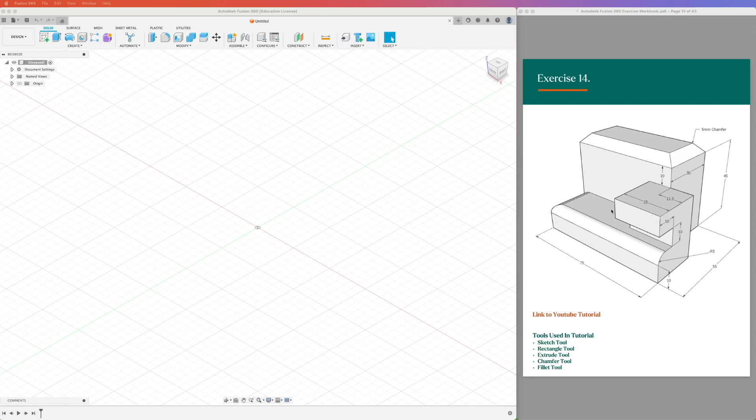I think what we're going to do here is draw this end face and extrude it back, then cut out the top half and extrude it back this way. We'll add on this last section over here, and then use the chamfer and fillet tool for these edges.

So let's get started. I'm going to jump onto this end face and draw my rectangles. This rectangle needs to be 10 plus the 5, so it's going to be 15 by...

55 minus 30. Those numbers come from 10 plus our radius of 5, going from this edge to this edge, and our 25 comes from 55 here minus 30 here. So there's our first rectangle.

Then we're going to draw our next one going up. It's going to be 45 minus 10, and the width of it is going to be 15.

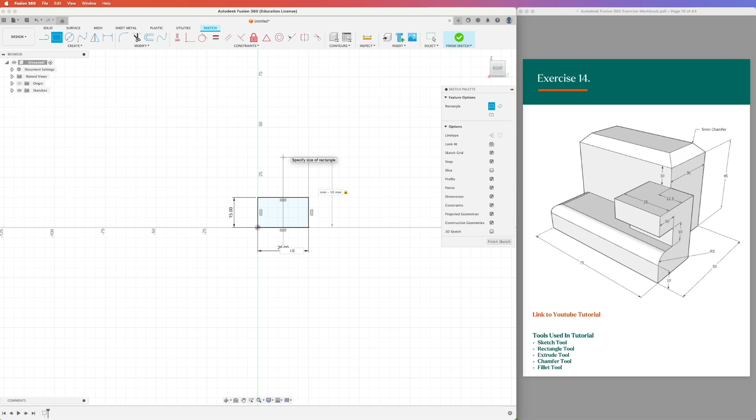So where do I get them from? 35 is 45 here minus 10. And the width here, if it's 25 from here to here, and this is 10, so this has to be 15. Then we're going to throw our last rectangle on here.

So our height of this one is going to be 10, and our width is going to be 25.

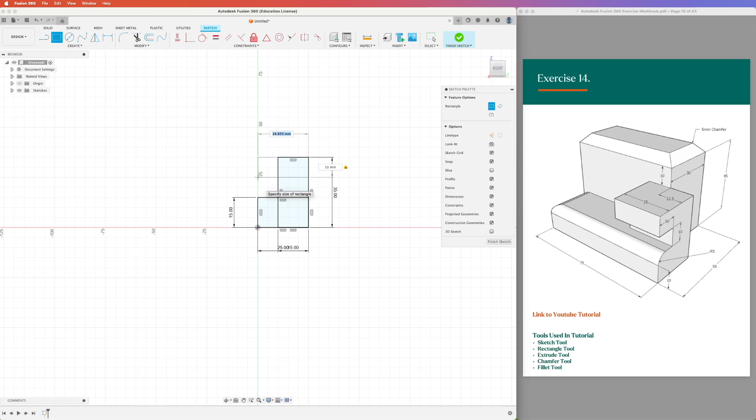So then I can extrude them back. I can just extrude all of these, and we're going to do it the whole distance, so I'm going to do it at 75. Then I'm going to flip it around.

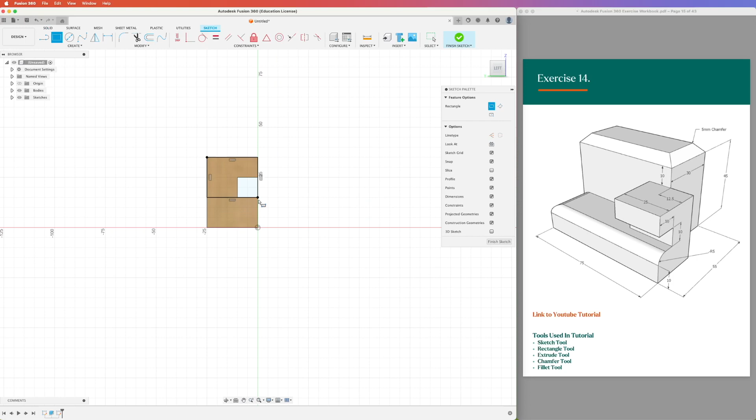I'm going to come in and create my sketch off this back face. I'm just going to grab a rectangle, go from this corner to this corner, because I'm going to cut out that other part there. So now I can extrude that way.

I can cut it out this way. So the distance of this is going to be minus 75 plus 25. Where do I get that from? 75 here, 25 here. So there's my first shape done.

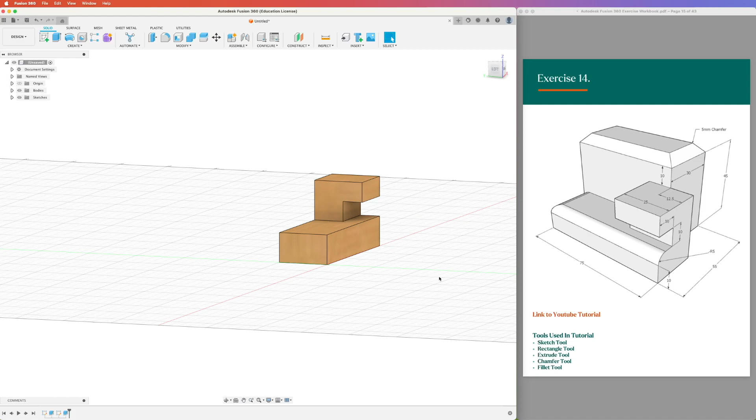I'm then going to come around and go off the bottom face, sketch, and just be careful the way it's rotated here. I need to draw this shape off this back edge, and it'll stop early here.

So we're going to grab that corner, draw him out, and he needs to be 30 wide. His length doesn't actually have a number, but we know the other one's 75, so let's just say he's about 50.

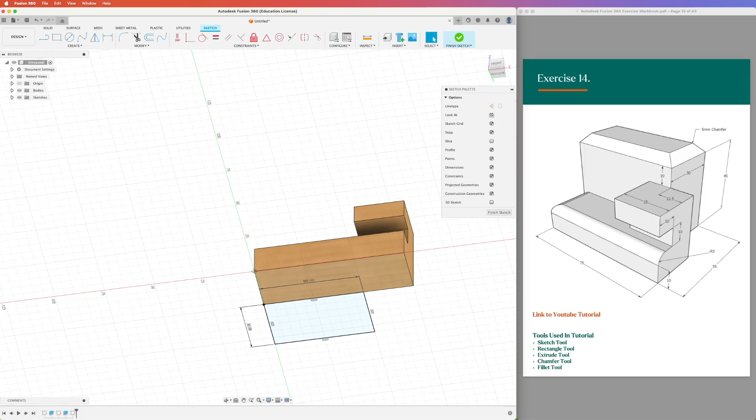And that should look about right. We might go a little bit longer because he looks like he's coming further than this edge here in this drawing. So 50 or 60, doesn't matter too much as long as our shapes are looking about right.

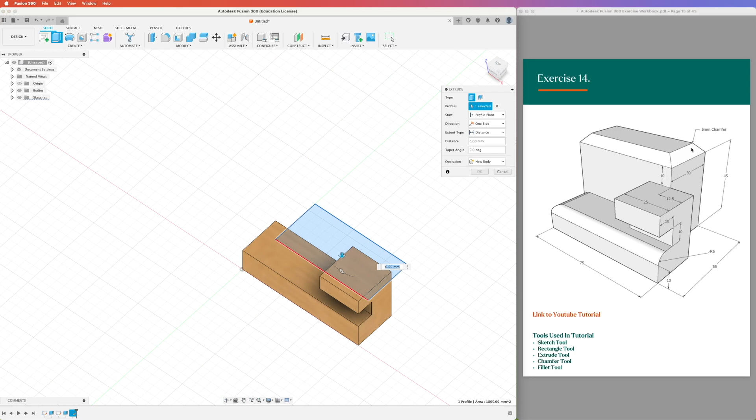We're going to extrude him up the whole way. We need to go 45 plus 5 millimeters here for our chamfer, which is 50, except we've gone the wrong way. So jump back in, double click on our extrude, and we're going to go minus 50.

So there we have our shape. Now we're going to use the fillet tool for our rounded edges. A fillet is just a rounded edge.

I can choose my two edges that need to be rounded, and I type in 5 millimeters for my 5 millimeter fillet, press enter. If I go into modify, I can come down to the chamfer tool, which is just an edge on an angle.

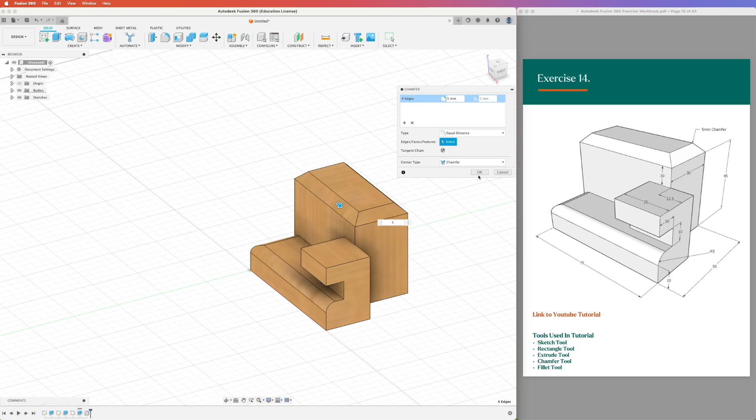So in woodwork especially, we can chamfer our edges. We might use a hand plane, we might use a router, but there's my chamfer, type in 5, it's equal distance. I can change it to have different angles and stuff like that in here if I wanted to, but this one's equal. Go OK. And there is exercise 14 finished.